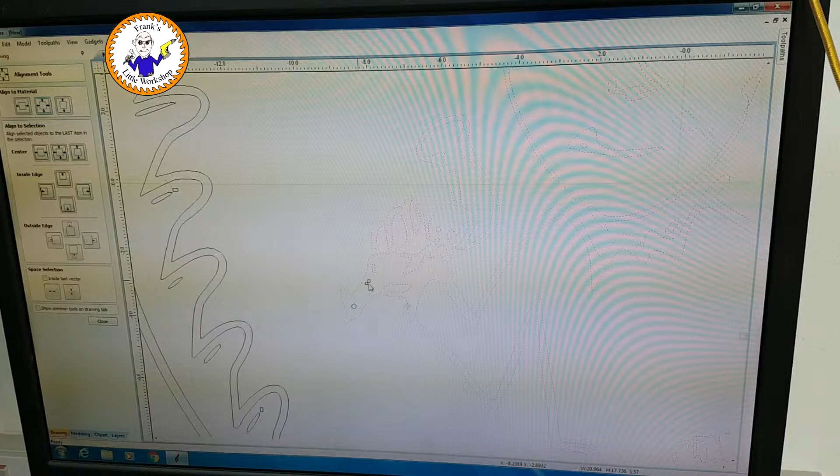And then what you see me doing here is going into the vectors and cleaning up all the lines. Obviously the more complicated the vectors are, the longer it's going to take to engrave. So what you see me doing here is selecting the different vector groups and zooming in and basically deleting any unnecessary vectors. You can see that I've actually grouped the figure as one vector and the outside is another vector. This makes it easier to manipulate the image.

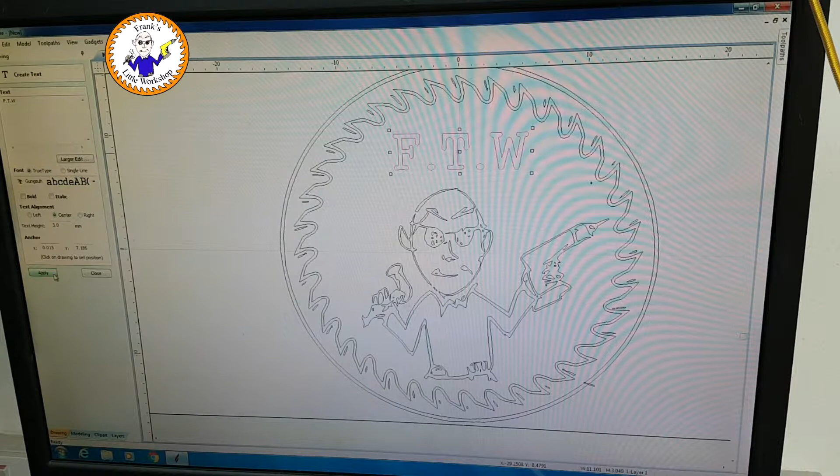Back to the lettering now, just basically the FTW, which is obviously my initials. Now what I've done is I've done the initials and then I've created a curve. Then what I do is I fit the letters to the curve. Obviously they come out too big to start with, then I need to manipulate them so they're actually the right scale and they actually follow the curve of the engraving.

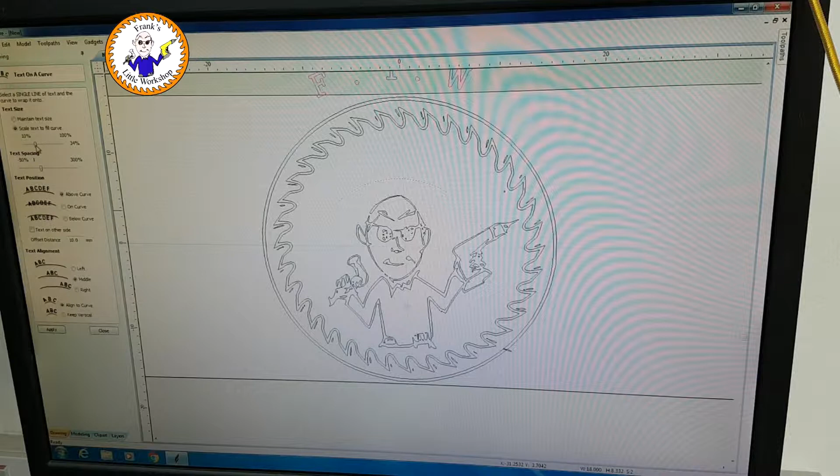So here you can see me pulling it into position, a fine little adjustment. So I've got to try and imagine what these are going to look like once they're teeny tiny and they've been engraved. Once that's done, I can delete my curve, reposition the figure. Once I'm happy with that, then I'd better quickly save it.

Okay, now to my tooling path. Started off looking at using it as a V-carve. This should give me an idea of what the final embossing is going to look like. So in my tool library I adjusted it because I was going to use an engraving bit, which is obviously a very small bit. So I added that to my library, then did a quick calculation.

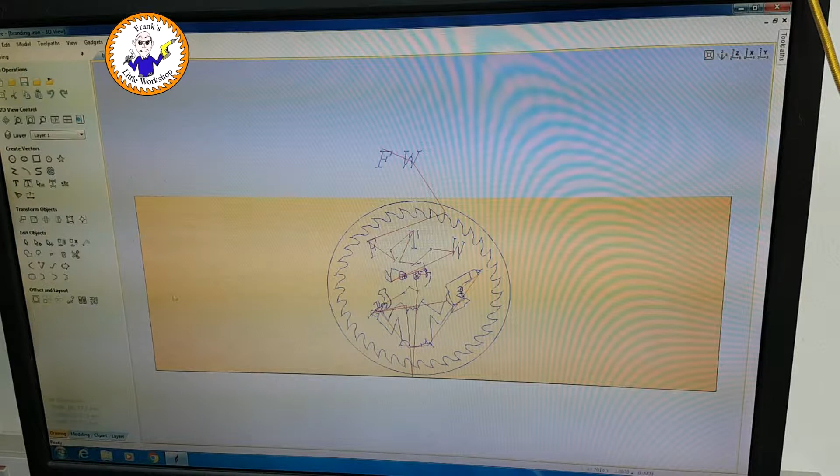Oh look, I've still got some odd letters there. What I need to do is get rid of those. Easiest way to get rid of them is obviously go back to your drawing and then just not select them. Select the remainder of the picture as vectors, and magically they've gone away. So this was the initial what it was going to look like.

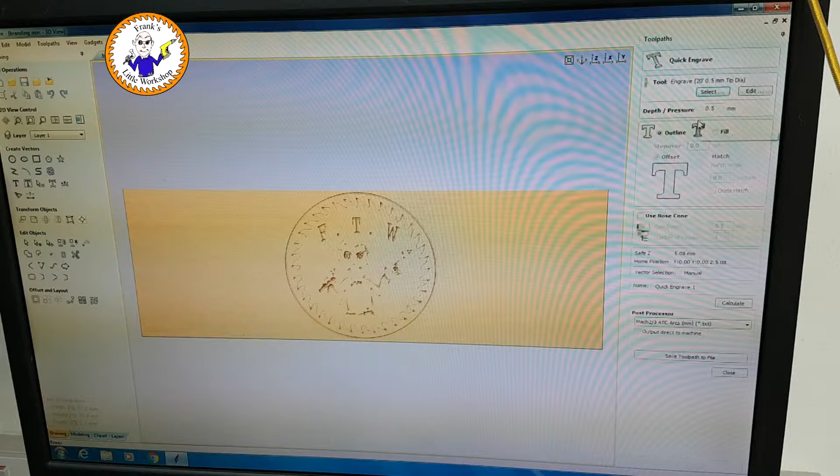Not quite good enough, so I had to do a bit of manipulation here, and then obviously see what it looks like as an engraving. Okay, changing the depth and the texture of the engraving. See what it's going to look like. Reset my toolpaths, have another quick look. Yeah, still not 100% with that. Back to V-carve.

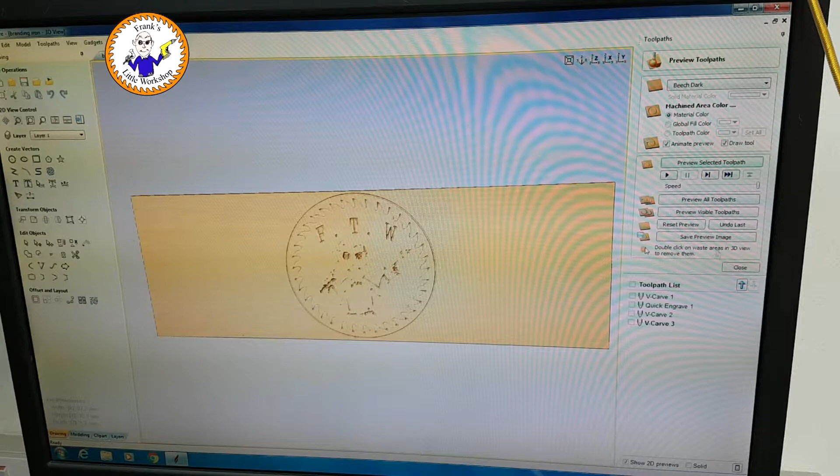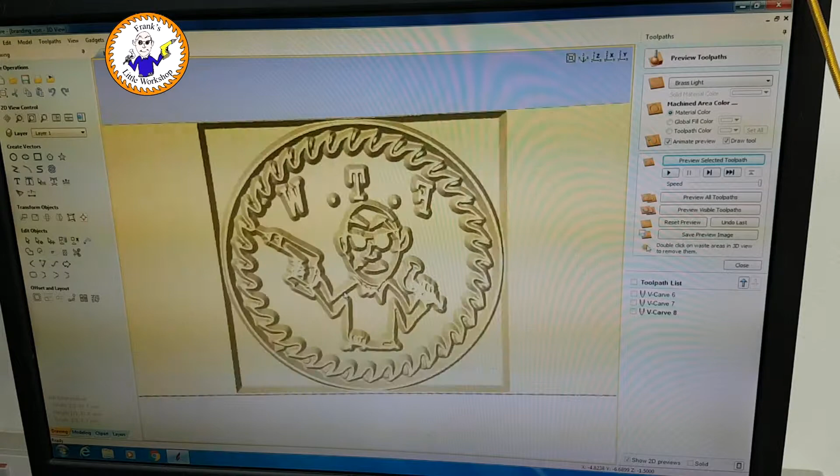Now what I had to do here is obviously, because it's going to be printing to a piece of material, I have to flip the image. So I basically flipped it horizontally, which you can see there. I'm now facing the other way. Another quick preview of what it's going to look like. This is looking more like it. Quick zoom in. Yeah, I'm quite happy with that.

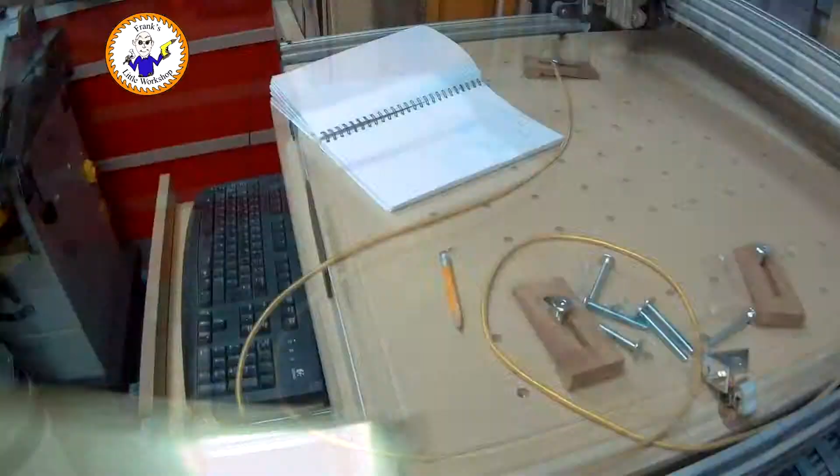Okay, so I think the best thing to do here is probably save the image and convert it obviously to G code, which could then be used in Mach 3 for the actual final engraving. So I think that went relatively successfully. So let's cut my material. Got my Aldi's special cordless angle grinder, cut the material and got it ready for going onto the CNC machine.

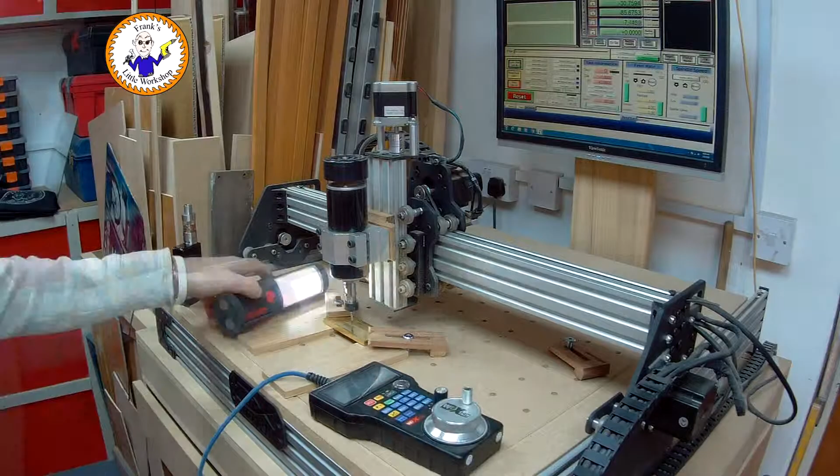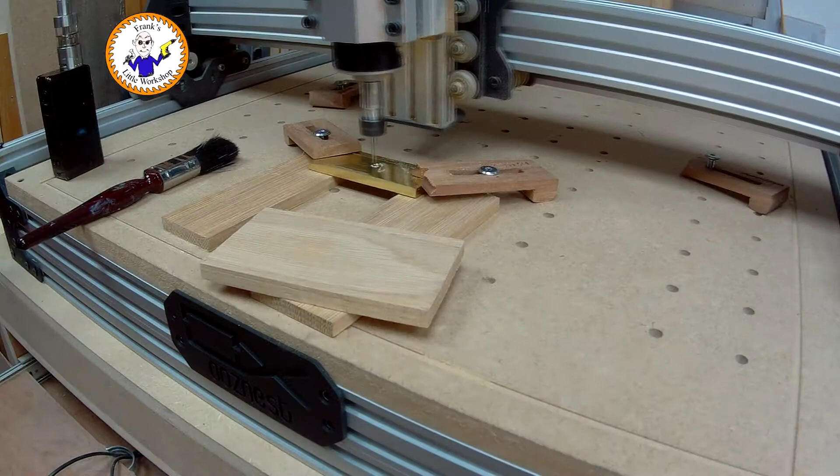Now mounting it is with my normal brackets. The problem is, because this is a very thin piece of brass, as you clamp it down it's actually distorted it a little bit, and you can see the end result of that later on in the video, whereas I'm only cutting to a depth of about 0.3 of a millimetre, and if you distort the piece of material by 0.5 millimetre then you end up missing out some of the detail.

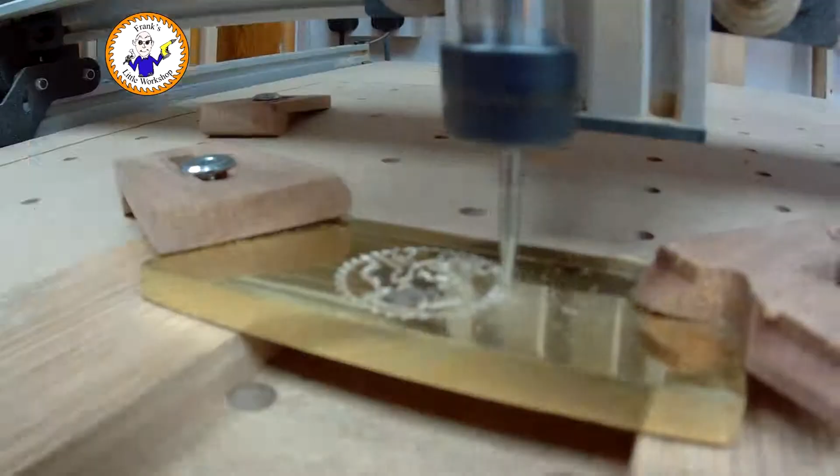Started the carving, and while this was carving, just checking it initially, I broke my first bit. It snapped off, so that's why you see me changing it again there. This is obviously sped up quite considerably, but yeah, it seemed to be going okay. So while that was doing its thing, I had to think about making the handle for the actual branding iron. So settled with that.

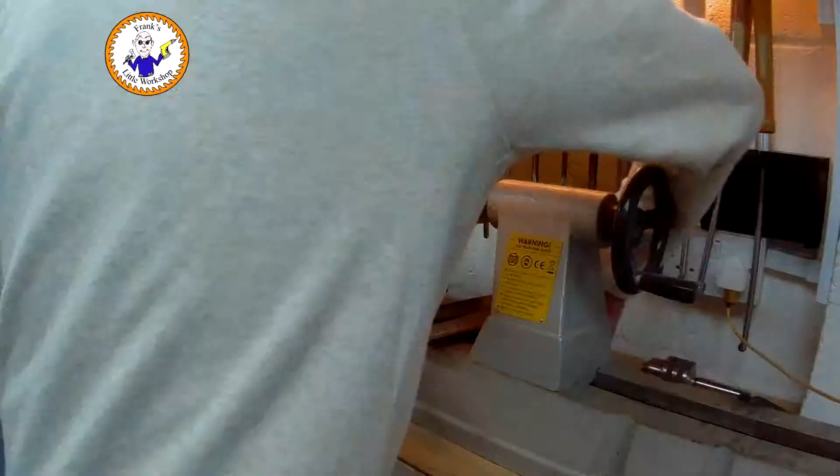So then it was over to the lathe. It's actually set up as a sander at the moment, so I reconfigured that to a normal lathe using a chuck. Selected my piece of wood that I was going to use. Now I was going to use a piece of oak, which is constructed out of small blocks of oak. It was actually a kitchen worktop at one point. Then cut it basically into a square, and then onto the lathe and start working it.

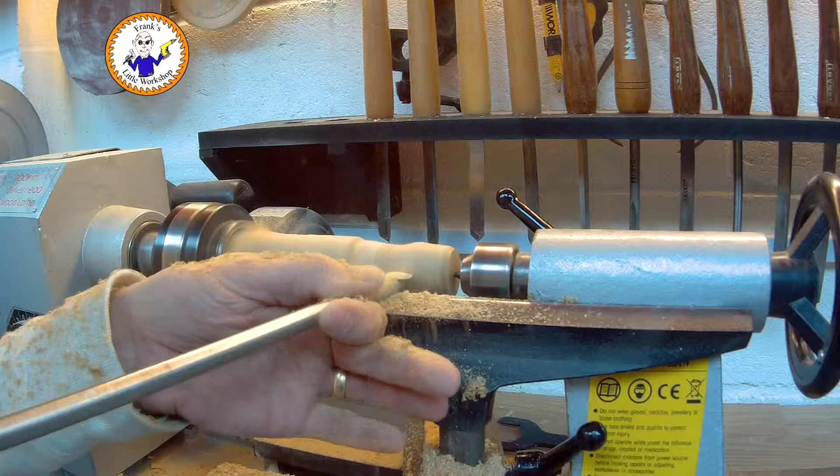Now the problem I had here is because it was actually block, there was end grain and normal grain, all facing different directions. So occasionally the chisel would catch into the piece of wood, which is what you could see there, and that finally ended up with me having to stop the turning and actually use some filler to fill in the holes. You can see me sanding it here, and if you look close enough, you can actually see where it's gouged a couple of bits.

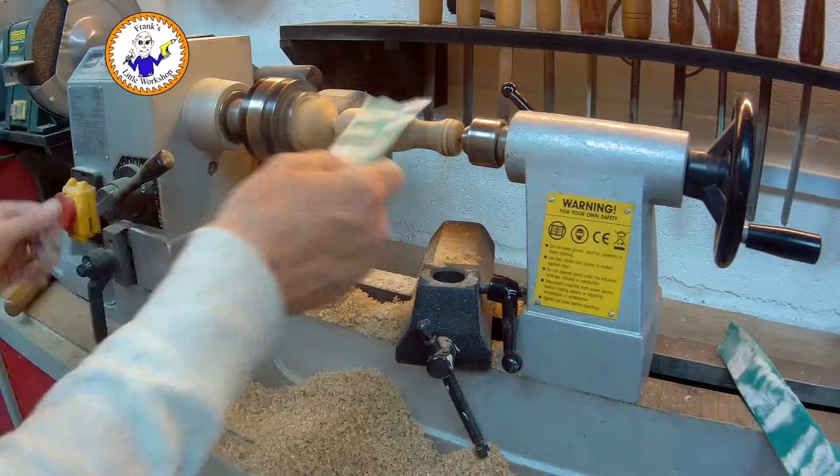So I mixed up some filler here. This is quite good filler. It's very much like body filler. Filled that, let that dry, give it a quick sand off. Obviously the final finish is not over important with this, because it's just a hand tool, as long as I was quite happy with it. So drilled a hole through the centre. This is where the actual rod is going to come out to screw into the actual branding iron.

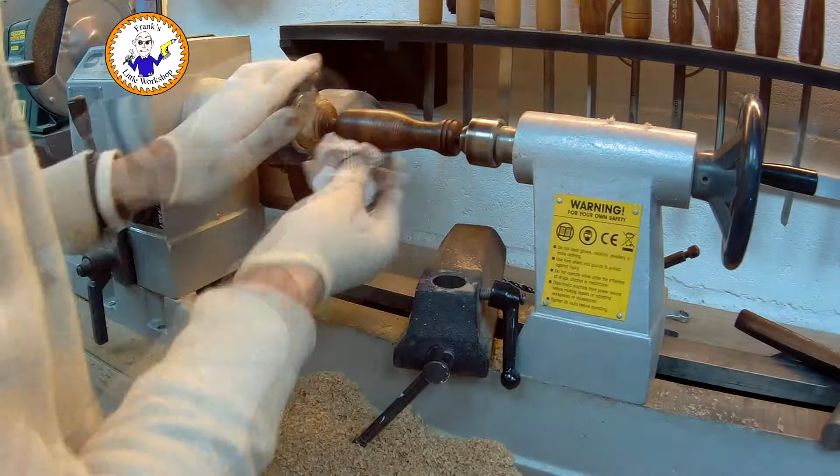Nice coat there of wood dye. Let that dry quickly, and then a coat of wax. Use my parting tool, part it off, and then start sanding it, and then putting the insert in, and then this is what happened.

Right, I've had a bit of a disaster. The handle that I was just making for the tool is split here. It's because this is oak. It's made out of block board, but it's oak. And I was inserting this into here, and obviously this is into the end grain, and it's just split. So I'm going to try and salvage this by cutting it shorter. See what I can do.

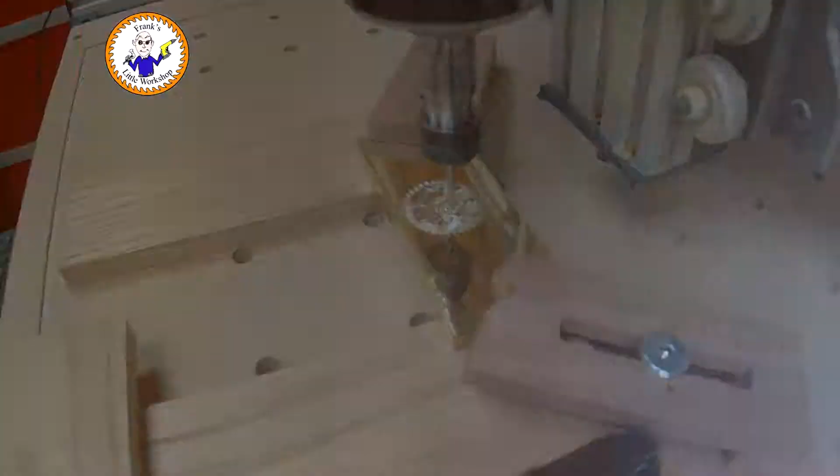So straight over to the bandsaw, chopped it down a little bit, which is a shame. It's taken the nice looking profile off of the handle. I was going to use the same insert, but this time I flattened it down. Here's a tip: if you're using Araldite, a couple of bits of masking tape on a surface, mix up your Araldite, pull up the masking tape and throw it away.

Just check on the CNC machine. Yeah, that's still going. It took hours and hours and hours to do this, but that seems to be going okay. Finally finished. Yeah, it's missing some detail on the top, but I couldn't get it back into the machine in exactly the same position.

Okay, trusty angle grinder, cut it to approximate shape, then a bit of sanding grinding around the edge to make it roundish. Then over to my bench grinder, and make it as round as I can. At this point it's looking very much like a coin. Put a wire brush in my lathe, and then quickly dressed the edges, and then finally screwed it together. So it's just a piece of rod, a final staining of the bits where I cut it off in the bandsaw, and there's the final thing.

So it's finally done. I managed to salvage the handle. I cut it shorter here. It's not as good as I wanted it to be, but I managed to salvage it for this one. I might make another one because this is actually too thin, but it's there. If you look here, the CNC machine didn't quite get all the detail here, so it's probably not very good, and also the actual embossing needs to be deeper.